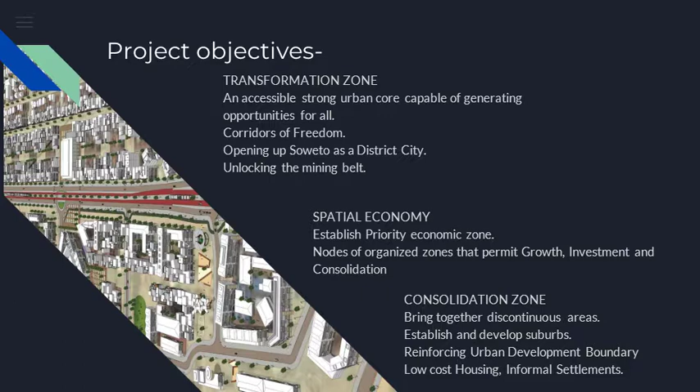In order to achieve a spatial economy, nodes of organized zones that permit growth, investment, and consolidation need to be established, which also means establishing a priority economic zone. Also, in order to bring together discontinuous areas and reinforce the urban development boundary between low-cost housing and informal settlements, a consolidation zone will have to be established.

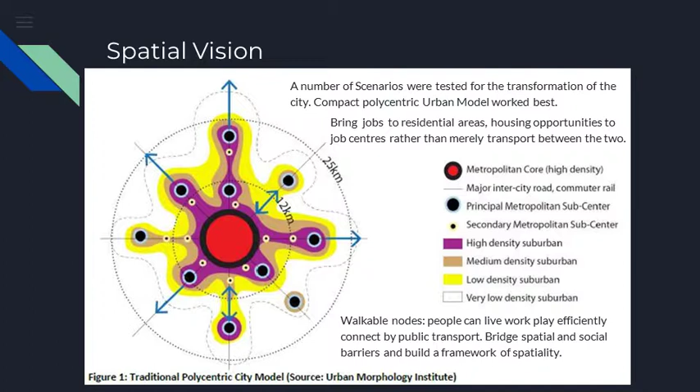A number of scenarios were tested for the transformation of the city. The compact polycentric urban model works best because it brings jobs to residential areas, housing opportunities to job centers rather than merely relying on transport between the two. It also creates walkable nodes where people can live, work, play efficiently, connected by public transport, and it bridges the spatial and social barriers and builds a framework of spatiality.

Key challenges. Spatial inequality from the past remains mostly intact. Housing is located far away from economic opportunities, and the private sector emphasis on car-orientated developments further reinforces segregation. There's a poor diversity in land use in the existing spatial structure. The polycentric urban form addresses these challenges by integrating discontinuous areas such as Modderfontein and the mining belt.

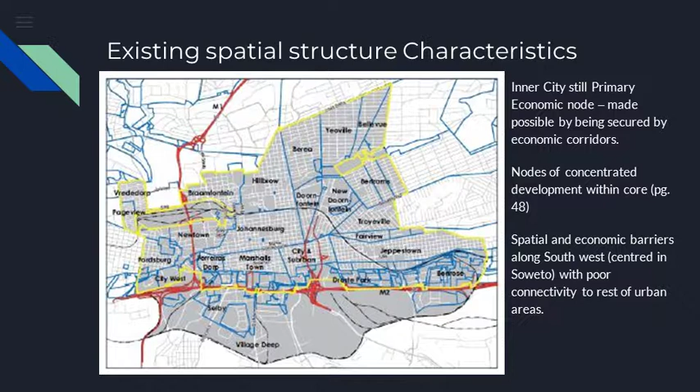In its current form, the inner city is still the primary economic node. This is made possible by being secured by economic corridors. There are nodes of concentrated development within the core. Spatial and economic barriers along the southwest with poor connectivity to the rest of the urban areas.

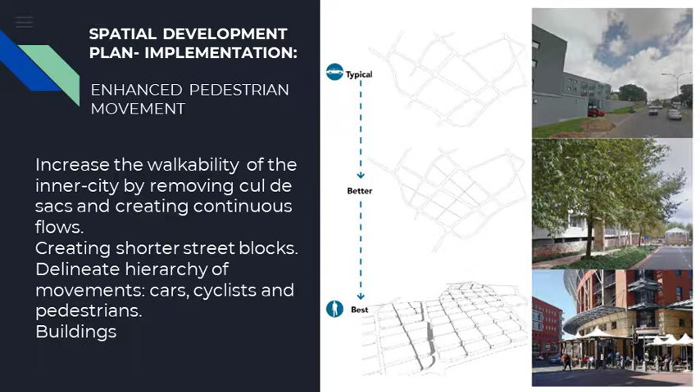On the ground, some key features have been developed in order to bring the idea of a polycentric urban form together. To enhance pedestrian movement, walkable nodes need to be created where people can live, work, and play, which would mean shortening the distances between amenities. Buildings should face streets as well as be located on the edge of the street, thus allowing pedestrian paths to flow continuously from property to property, as well as providing passive security benefits and spatial legibility.

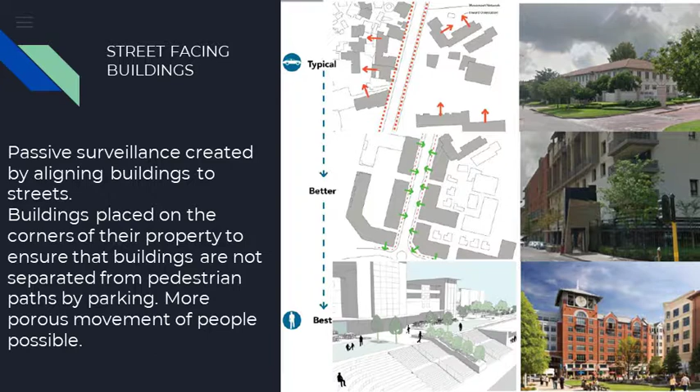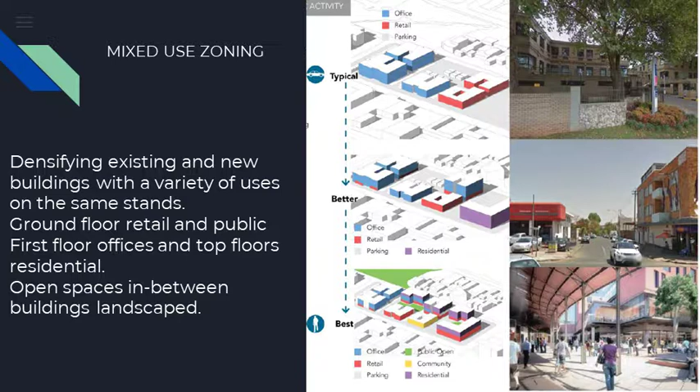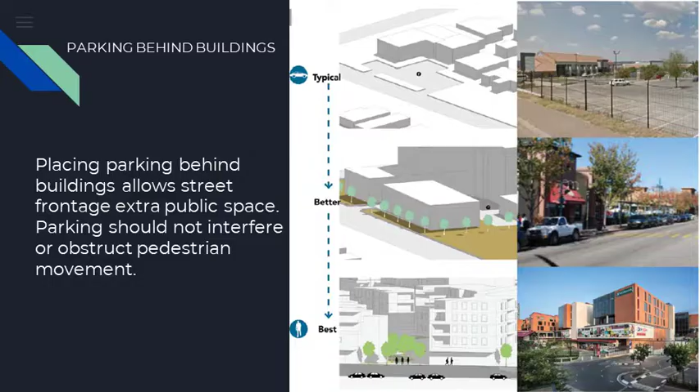In order to reduce distances, mixed-use zoning can be implemented, which entails densifying existing and new buildings with a variety of uses on the same stands. There should be an order to this. Ground floor should be retail and public, first floor offices, and top floors should be residential. Open spaces in between buildings should be landscaped. Placing parking behind buildings allows street frontage and extra public space. Parking should not interfere with or obstruct pedestrian movement.

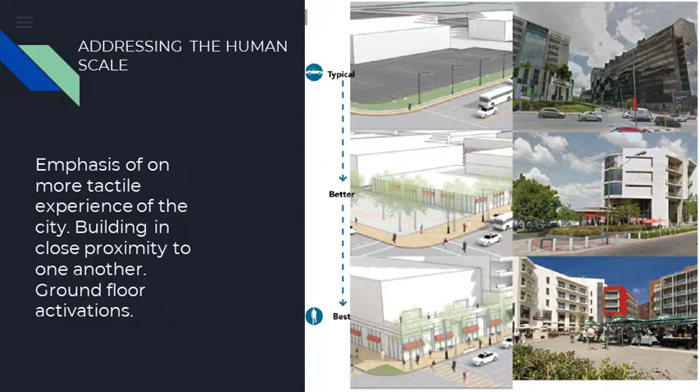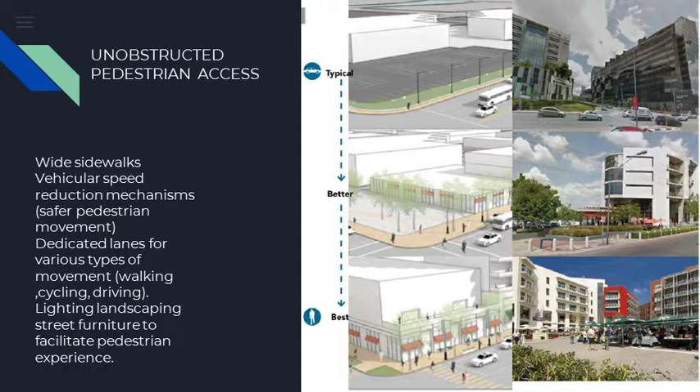The built environment needs to respond to the human scale. There should be an emphasis on a more tactile experience in the city, building in close proximity to one another, as well as ground floor activations. The city should facilitate pedestrian access. Wide sidewalks, as well as vehicular speed reduction mechanisms, can ensure safer pedestrian movement. Dedicated lanes for various types of movement, lighting, landscaping, and street furniture may help to facilitate the pedestrian experience.

To encourage well-developed transport systems, high densities of people are required. Thus, high-density areas also have the effect of creating a more compact city in response. Public open spaces need to be responsive. This is achieved by multi-purpose community facilities, social and economic integration through encouraging mixed activities, as well as providing informal trading facilities and civic services.